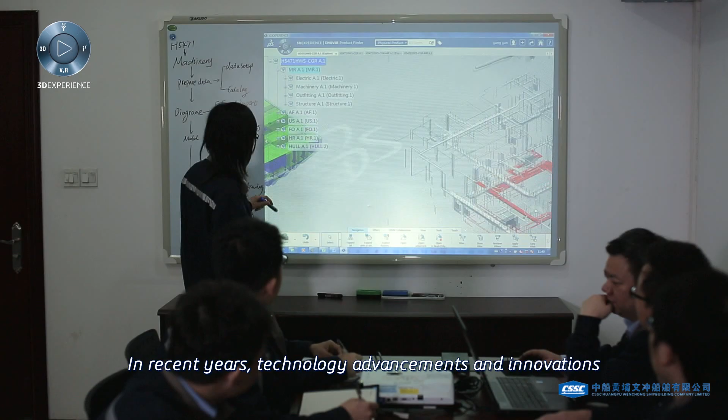The shipbuilding industry in China is currently facing serious market conditions. New orders of ships are sluggish while shipbuilding costs are high. In recent years, technology advancements and innovations have become the biggest driving forces of Huangpu Wenchong's development.

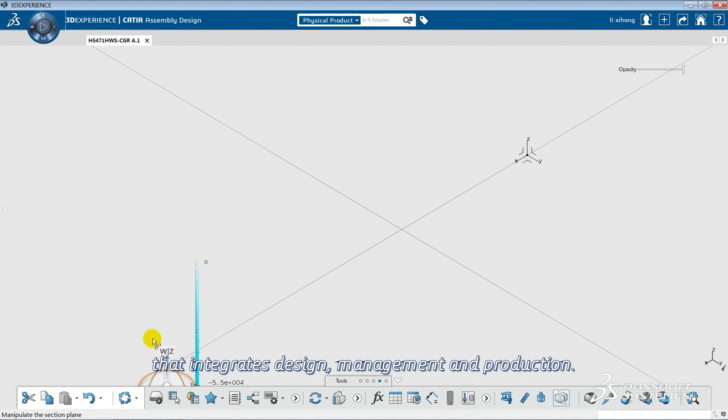Our digitalization program essentially builds on Dassault Systèmes' 3DEXPERIENCE platform to develop and deploy an efficient shipbuilding management system that integrates design, management, and production. We have restructured the design and building business processes on the basis of the 3DEXPERIENCE platform.

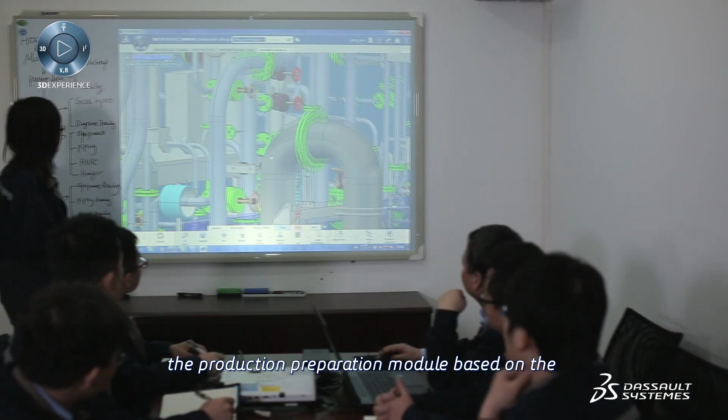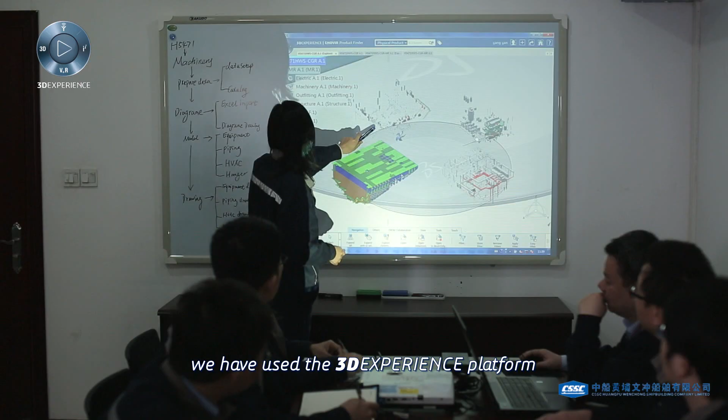We also have applied Optimized Production for Sea, the production preparation module based on the 3DEXPERIENCE platform, to our design processes. In the 2,700 TEU container ship program that started on September 2, 2016, we have used the 3DEXPERIENCE platform with up to 102 designers involved.

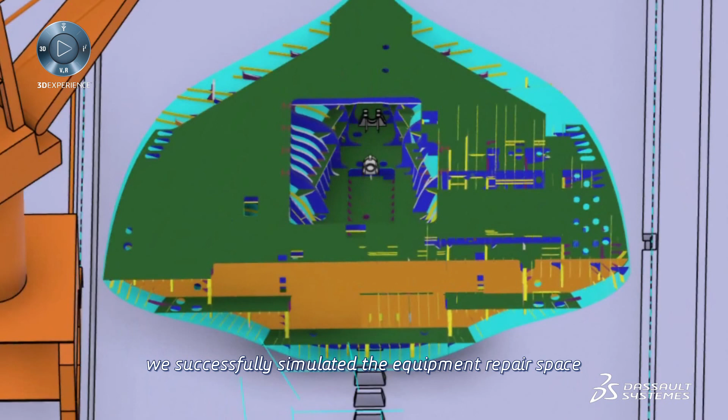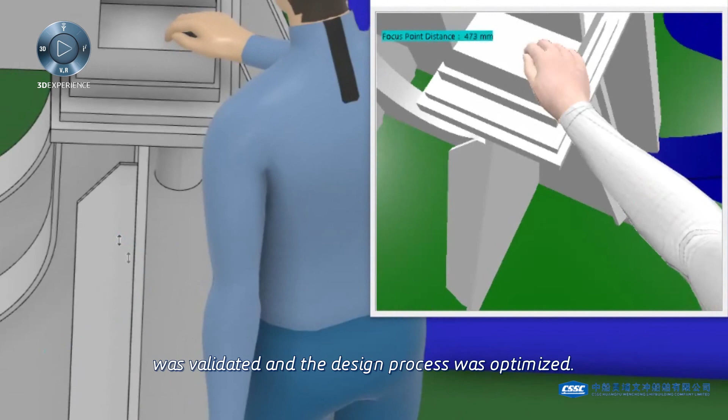We use Designed for Sea for electrical and fluid systems design so that the designers of these disciplines can work simultaneously with structure designers. Leveraging the ergonomics module of the 3DEXPERIENCE platform, we successfully simulated the equipment repair space and the space of special paths during the process of design, so that the compliance of the design was validated and the design process was optimized.

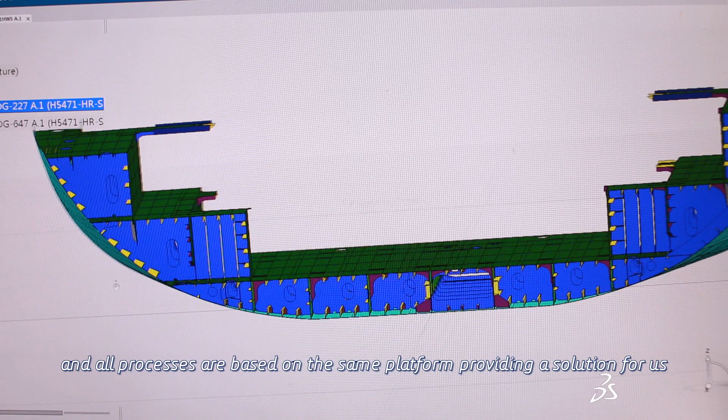In the past, Huangpu Wenchong used hundreds of disconnected software systems for design, production, and management work. The 3DEXPERIENCE platform provides a single data source, and all processes are based on the same platform, providing a solution for us to tackle those problems that have been troubling us for a long time. Huangpu Wenchong hopes to leverage 3DEXPERIENCE platform as a smart manufacturing platform for our company to improve efficiency and quality.